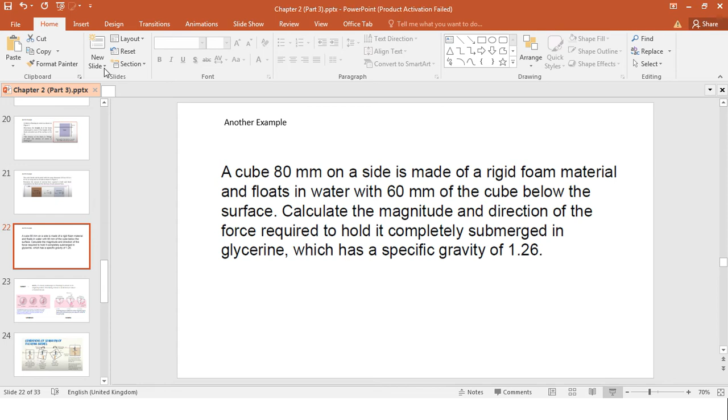Okay, before we go to the next subchapter, any question regarding buoyancy? Ada soalan pasal buoyancy? Any confusing terms or whatever? Tak ada? No, sir. This we have done yesterday, right? Yes. So do you want me to repeat or we can go to the next subchapter? Go to the next chapter, sir. Okay. If you miss this, you can refer back to the video for yesterday.

So there are two different scenarios. One whenever the body is submerged in the fluid, whatever fluid, and the second one is floating. Let me go back to this. I want to allow people coming. Sorry.

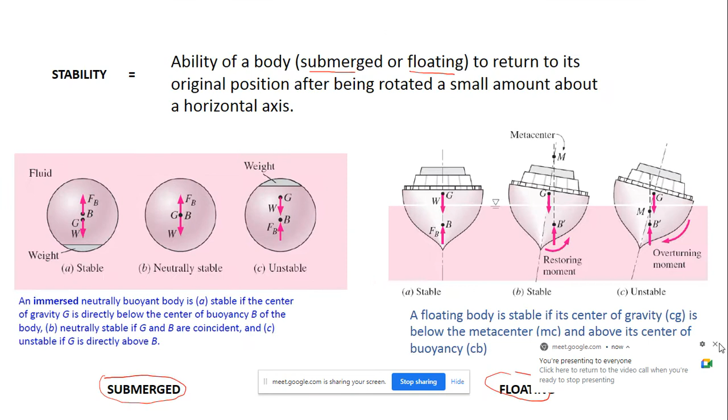Okay, so there are two different conditions. One, the body is submerged, and two, the body is floating. The first one, submerged, is very straightforward, tak pening. You can tell the object is stable if the center of gravity, G, which we call CG, is directly below the center of buoyancy, or CB. If your CG is below your CB, like in this ball, the object is stable.

If the center of gravity of the object is equal with the center of buoyancy, then the ball is neutrally stable. And the last condition, where your center of gravity is above your center of buoyancy, your object is unstable and it will rotate, whether to that side or this side, until it stops.

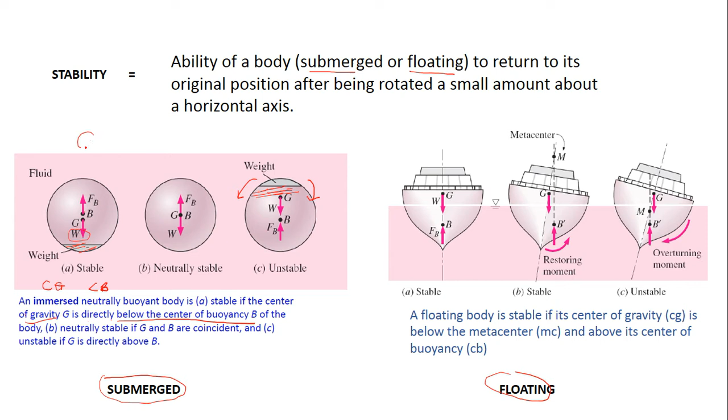But if the weight is more at the top, your center of gravity is higher, and your object is unstable. This is the only condition you need to understand for any object submerged. You're only interested in the CG and the CB. If the CG is below your CB, it is stable; if your CG is above your CB, your body is unstable.

Okay, so that's the first condition, first scenario: submerged. Don't forget, it's submerged in the fluid. Okay, this one is settled, meaning easily understood. And the second one, which is still easily understood, still easy, not too complicated, just that in this case,

whenever the object or the body is floating, you have another term, another component which we call the metacenter, MC, and we will call it MC throughout the session. You still have your center of gravity, and you still have your center of buoyancy, and the additional thing is you have your metacenter.

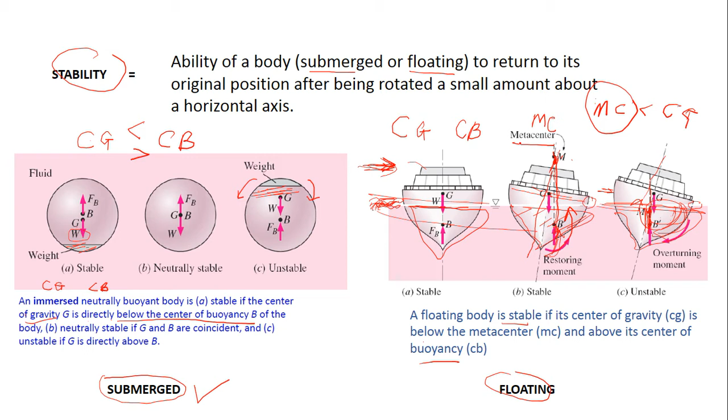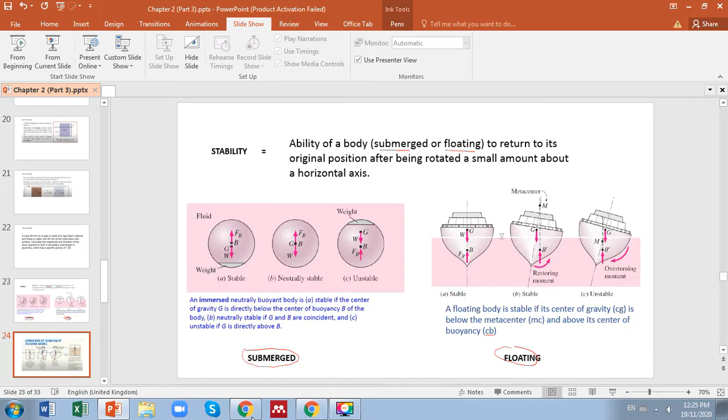Saya nak masuk. Okay.

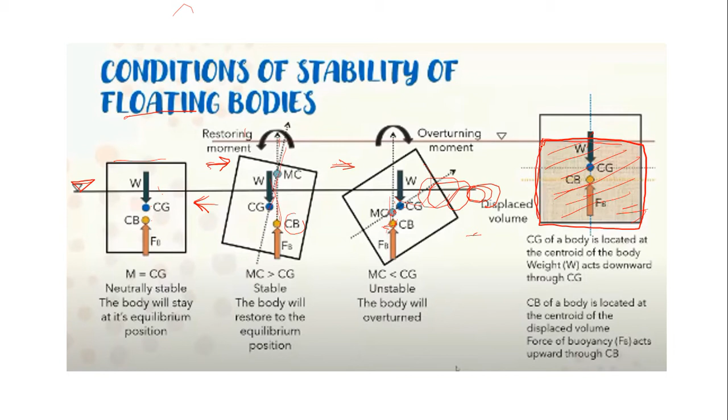So where is your CB here? Your CB is half of your displacement height, and your CG is half of your total object. That's how you locate your CB and your CG. Let's say this is HD, from the level of water to your bottom. This is the displacement height. Half of HD is your center of buoyancy, but for center of gravity it is the total height of the object. Half of this will give you your CG. It's very easy.

This one is the submerged body, which is very easy, without any other component. It's just your center of gravity and your center of buoyancy. If your center of gravity is below your center of buoyancy, then your body is stable. So not to worry about objects which are immersed. It's very easy. For floating, I'm not too worried either because it's easy to understand. You have another metacenter component.

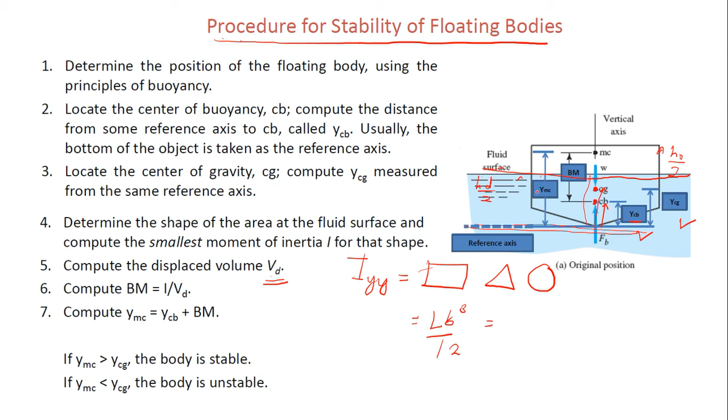And then you need to compute the displaced volume VD, the volume underneath here. How much volume is displaced, the submerged part? We know volume is area of the surface times the height. Since this is a displaced volume, it's the area times the displacement height, A times HD. Let's say your surface area is a rectangle, and the submerged displacement height is 2. So this is a block like this.

So your displaced volume is the area of this rectangle, maybe 5 by 5, times the submerged displacement height, in this case 2. So 5 times 5 times 2. That's your displaced volume. Depending on the shape, whether it's circle or triangle, you need to determine the shape of the surface. So now you have your VD.

Why do we need to find IYY and VD? Because we want to compute this distance, BM. So what is BM? BM is from your center of buoyancy, your CB, to your metacenter point. It's drawn here. From your center of buoyancy to the metacenter, this is BM, and we can calculate it using this formula: IYY divided by displaced volume.

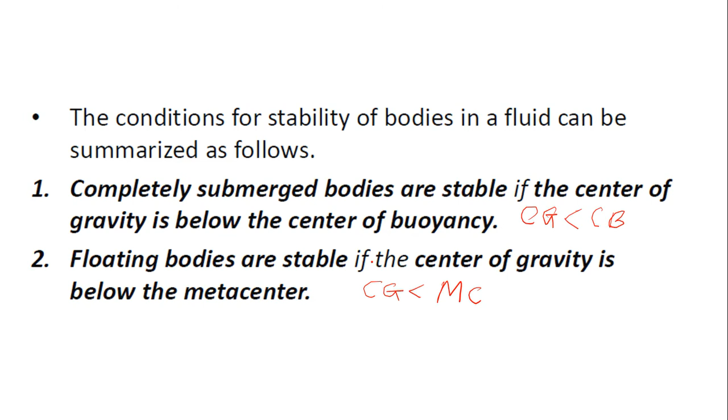But for floating bodies, it is stable if your center of gravity is below your metacenter. So this is different, two different scenarios: one for submerged and one for floating. We are more interested in floating bodies because this is not straightforward to find. For submerged bodies it's very straightforward, you just determine the CG and CB. But for floating bodies, you need to find your MC first.

Then you can compare with your center of gravity, and it tells you whether the body is stable or not. Okay, so this is another picture, maybe it's clearer than the one I drew before.

So again, to find your CB, center of buoyancy, it is the HD by 2. The displacement height from here, from your free water level sampai ke bawah, so this is your HD. This HD divided by 2 will give you your center of buoyancy, and your center of gravity is just half of your total object height.

The total height of the object, HO, divided by 2 will give you your YCG, dari bawah, reference dari bawah. So this is dari sini your YCB, and dari sini sampai your point center of gravity, this is your YCG.

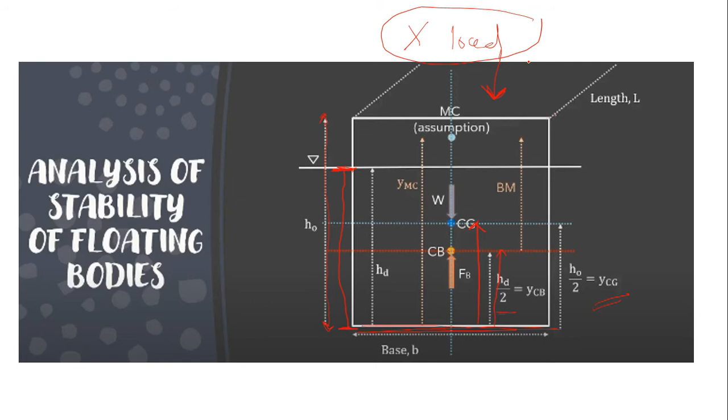To find this, the condition is there is no load on the object. Tak ada load pun kat sini kan. As you can see, this cube is floating, and there is no additional load placed on it. There might be different cases where there is a load on the object, and then there are some changes in how you find your HD.

So, jadi YCG, your center of gravity, is the total height of the object just divided by 2, and your center of buoyancy is the displacement height HD divided by 2. You need to remember this formula to find YMC, the metacenter, which is equal to BM plus YCB. Your BM you can find through this formula: the second moment of inertia about the y axis, divided by the displaced volume. The displaced volume is the area of the surface times the displacement height, giving you your VD. The second moment of inertia just refers back to the shape of the area, whether it's rectangle, triangle, or circle.

So you find your BM and you find your CB, and that will give you your YMC. Whether the YMC is larger than YCG or lower will tell you whether it's stable, not stable, or neutrally stable, sama. Okay, so that's it for the theory behind this. Any question?

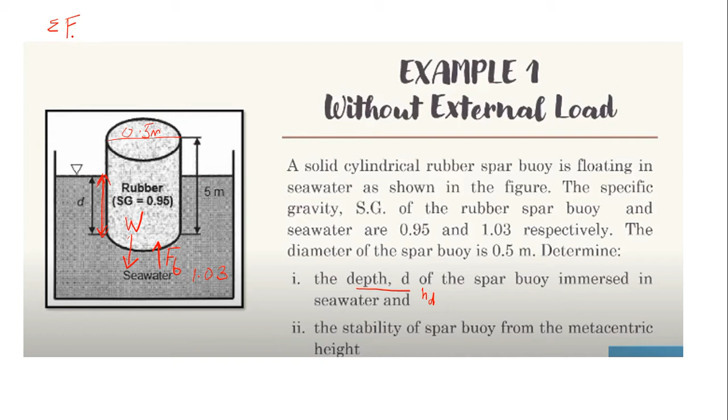Because the object is floating, and they want you to find the HD, we know the summation of vertical force is 0. Taking upward as positive, that means FB minus W equals 0, and FB equals W.

Understand? So far okay? Any question so far? Yes sir.

Okay, so you know your VD, we can write it as A times HD. So you can write the rho of the fluid times G times area of the surface, which is this circle, same shape as the cylinder, times HD, the one that you want to find, is equal to the rho of the object times G times A at the surface times the total height, because for the volume of the object we need to multiply by the total height.

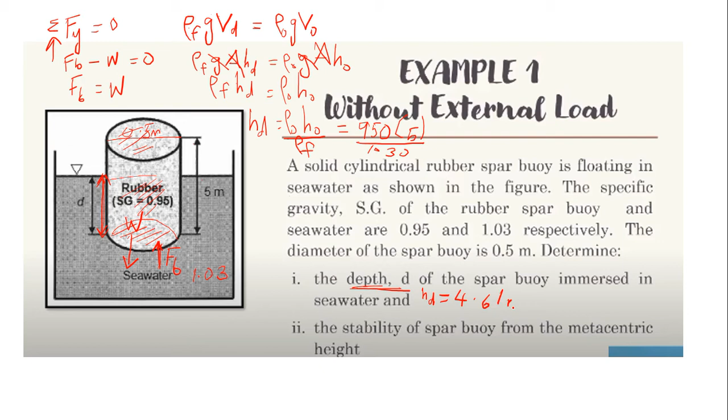So if you calculate this, it will give you 950 times 5 divided by 1030. You get 4.6, 4.61. So your HD is 4.61 meters here. Okay.

And the next question, they ask you to find the stability of the spar buoy from the metacentric height. After that, they ask you whether this spar buoy, this rubber spar buoy, is stable or not stable. That's why they ask you to find the HD, because you will use this to find your value for the metacentric height.

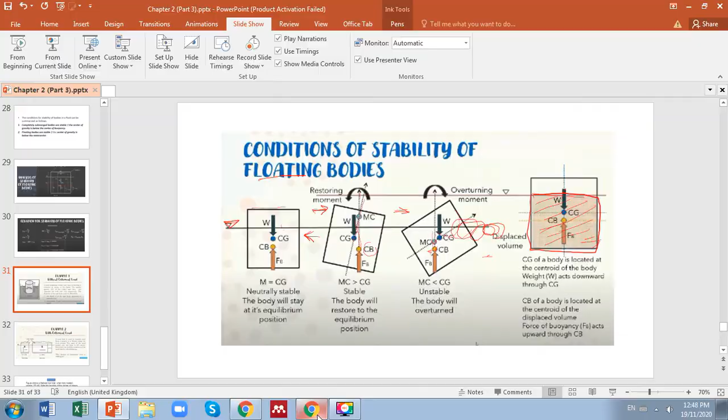Okay, let's see how we can analyze whether this object is stable or not stable. Now you have your total height of the object.

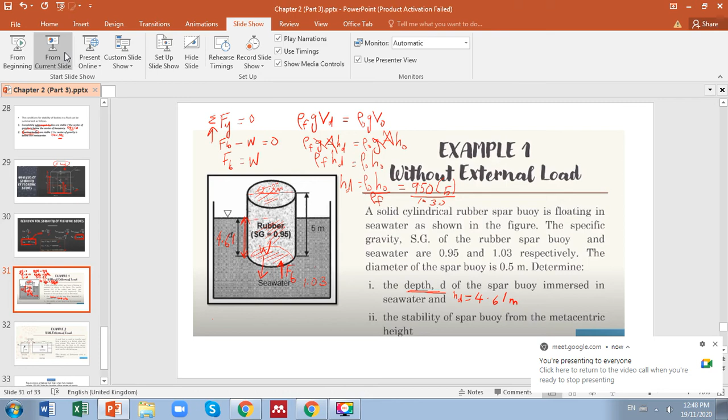So now you want to analyze whether this object is stable or not stable. First, from the procedure we saw in the lecture slide, you need to find your CG, your YCG, correct? So how do we find YCG? HO divided by 2. YCG, center of gravity, HO divided by 2. So this is 5, because they give you 5 divided by 2, and this is 2.5.

Okay, and then you need to find your YCB. YCB equals HD over 2. So this is the one you have calculated, 4.61 divided by 2, and they will give you 2.305.

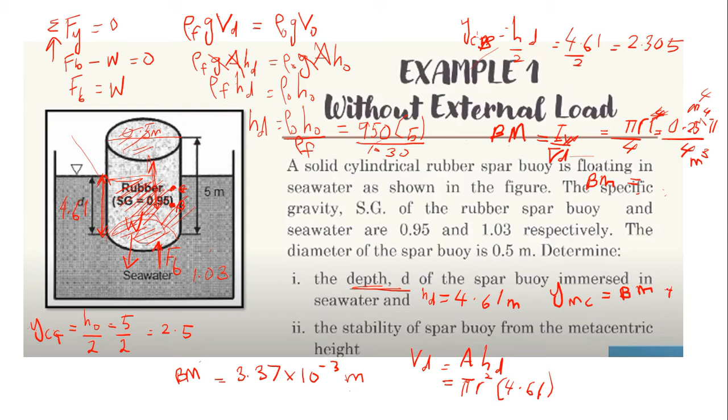So next, what else do we need to do? Find YMC. Okay, how do you find YMC? BM plus YCB. Now tell me the number for YMC. BM you already have here, plus YCB. Where's YCB?

2.305 plus 3.37 times 10 to the power of minus 3. So 2.3 something. What value? 2.31, meters. Okay, so now how can you conclude whether the body is stable or not stable?

Kalau YMC tu lagi tinggi daripada YCB, dia stable. Compare dengan YCB. Remember? We compare with YCG. Oh, YCG. Don't forget. Okay. So now your YMC dengan YCG.

Okay. So your YMC is 2.31 and your YCG is 2.5. Sini kan 2.5 kan. And this is less, your YMC is less than your YCG. That means your body is unstable. And so you can conclude the body is unstable.

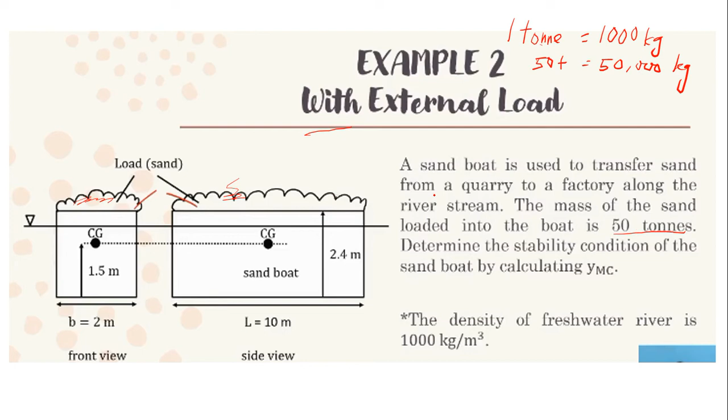Determine the stability condition of the sand boat by calculating YMC. Okay. Sama macam tadi, cuma dalam ni dia ada external load. Okay, what you need to find first? Oh, no, sorry. Sebentar. Okay. Go back.

Now, these are two pictures, and they give you the mass, M is equal to 50,000. So you already can find what from the mass? Apa boleh jadi? W. Okay, what is the W? Equal to mg. You just times the 50,000 times g, 9.81, and this gives you berapa nilai dia? 50,000 times 9.81, 490,500. What's the unit? Newton.

Good. Kat sini maksudnya dia ada weight ke bawah. And you know this is the weight, 490,500, and you have your buoyancy force, and because it's floating, your FB is equal to W lah, kan? Betul? Now from your buoyant force formula, the rho of the fluid times g times the displacement volume, is equal to 490,500. Right?

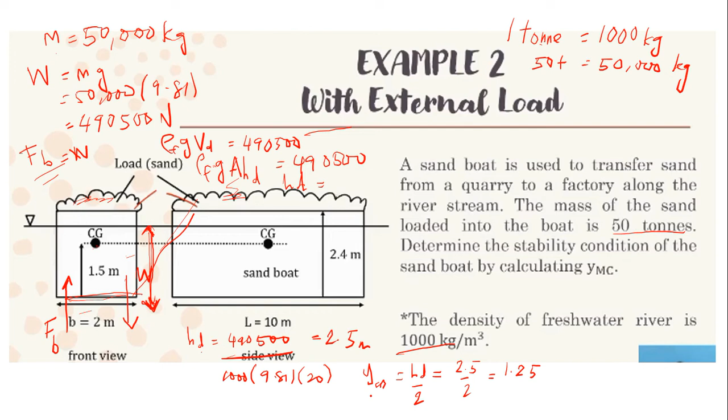So your YCB is 2.5 divided by 2, equal to 1.25. So you have your YCB, you have your YCG. Now kita nak cari sama ada dia stable atau tak stable kan. So you have done your second and third step kan. Ya ke? Dah cari YCG, dah cari YCB. Next one you need to find what?

Your BM. Correct, good. Which is equal to IYY over VD. So tell me what is the IYY for this case? The rectangle, so L B cubed divided by 12. Okay, the length is 10, the B is 2, divided by 12. So equal to 80 bagi 12. Apa?

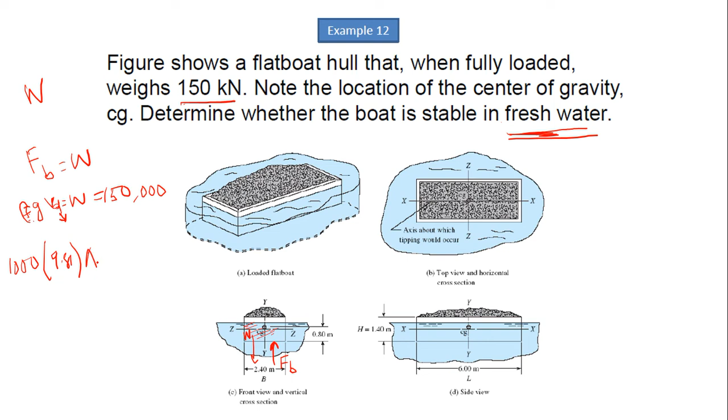V here is what? VD, the displaced volume, the submerged volume. Remember to denote it so you're not confused. Displaced volume times rho G equals W, and you know your W is 150 kilonewton, convert the unit. Rho of water is 1000 times 9.81. What do we do with VD? Separate it into A times HD. This is equal to 150,000.

The area for this problem? 6 times the base, which is 2.4. So 2.4 times 6, times HD, equals 150,000. Now you can find your HD. What's your value of HD?

Berapa HD dia? 1.06 meter. Okay, good. Okay, after that, what do you need to do? Cari apa ni? YCB. Okay, YCB equal to HD over 2. HD over 2, good. So this is equal to 0.53. Okay, so you have your YCB.

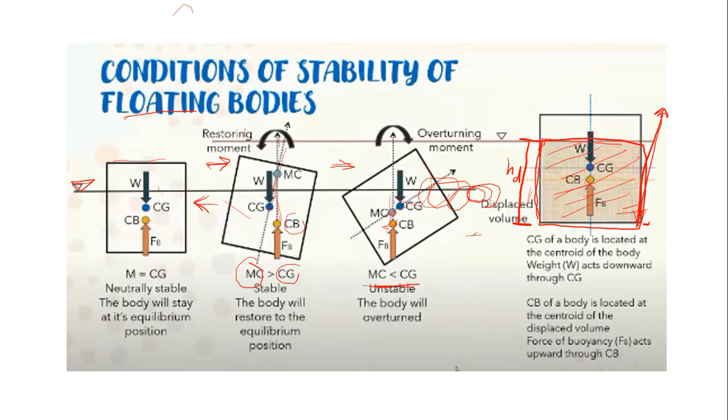But I will double check. Let me double check first, I don't want to give fake news. Let me confirm this, and I will post it in the group. Okay sir, thank you sir. Alright. Any other question?

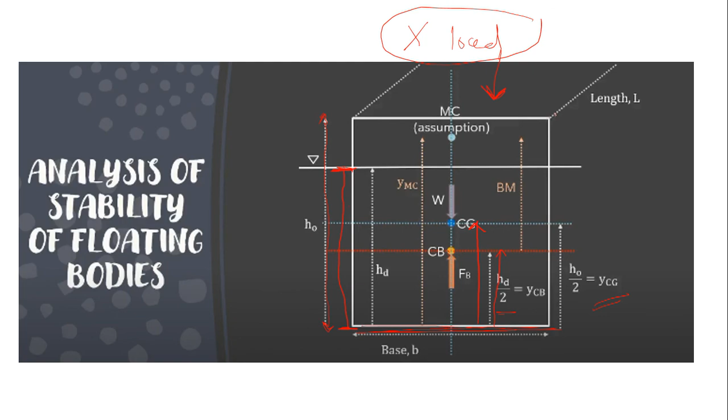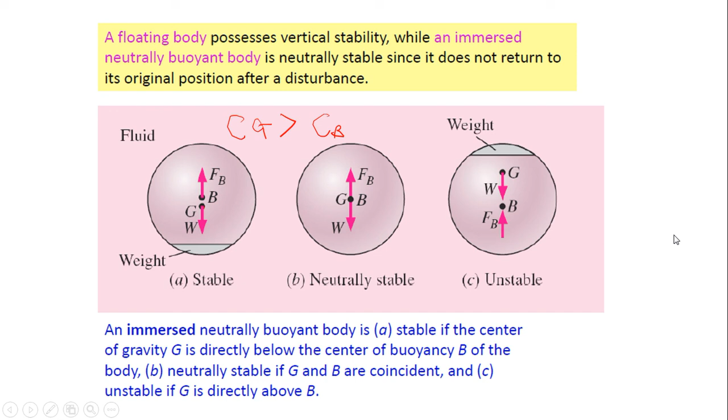What you need to be aware of is that normally it's the floating body yang dia nak analyse. For submerged it's easy, tak payah susah. It's just a matter of whether your center of gravity is below the center of buoyancy. And when it's immersed, there's no metacenter component.